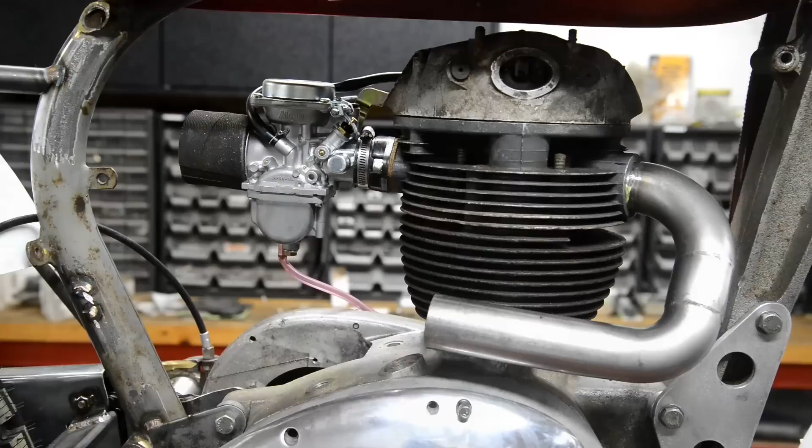Nothing much to say. Let's just move you around and we'll start doing some work. Alright, well, I actually gave this a rub over with the old Scotch-Brite thing. Do you know, I am chuffed to death with that weld in there, that little autogenous weld, putting the pulse on. It just worked out beautifully.

So anyway, as I say, I set to with a couple of different sanding devices, and I got rid of those welds. It still needs finishing off a little bit, and I did the welds at each end as well and gave it a quick polish up.

So now, you know, this inner tube I used - I don't know where I even got it from. It was only about 45 thou wall thickness, so it's a bit thin. Actually, it made it murder to try and weld, because - those of you who maybe know TIG welding better than I do can tell me if I'm wrong on this - I had real difficulty with it, and then I decided that what it probably was, or what my main problem was, is it's so thin.

I mean, I know people weld razor blades together and stuff, but because there's so little metal there, you virtually can't form a puddle, or at least I can't get enough control to just form a puddle without going through. I think I mentioned before that a couple of the people I like to watch to pick up hints and tips from, whenever they're welding alloy, I've never seen them weld anything thinner than about 1/8 of an inch, 3/16, even a quarter, and they're using 1/8 inch rod. So when they strike up an arc, they've got a huge thickness of metal. They can form this nice big puddle, and the puddle flows out, and they can just touch the rod into the leading edge of the puddle. But when you're doing really thin stuff, your puddle is just there - you can't get it to move around. Anyway, that's what I think it is.

Alright, so next question is, let me move you again very slightly, open you out a little bit. What do we do next? Do we need to know where the airbox is going to be to shape, because the oil tank is going to be one of those weird shapes again? Or do we make the oil tank and then fit the airbox in?

I was asked about using a pod filter, and I do, as you know, on the BSAs, the 250s, use a pod filter, but there the carb is right back here and the pod is under the seat with little side covers on. Here, if I put a pod on, it would be right out in the weather, getting water splashed up and dirt on it. So I'm going to make an airbox so we can have the filter part out of the way, breathing into the box instead.

So you're going to have to watch me do some thinking here. We're going to make it go down into here to give us some good volume. We've got a piece that will go through there, down and through there, and then a piece that will come up here.

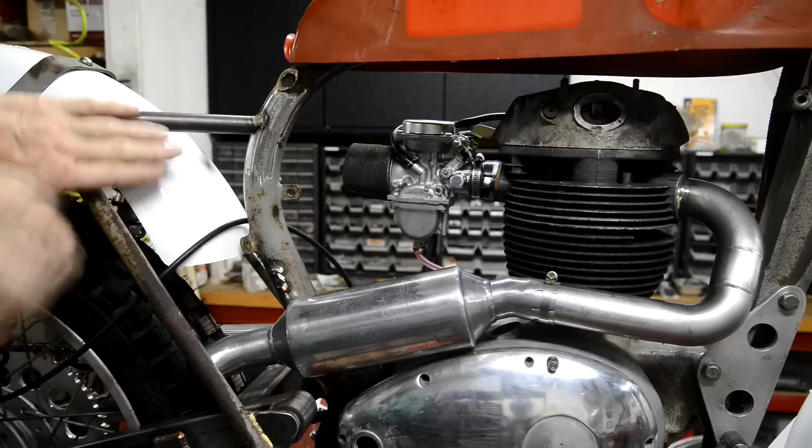Probably will I make it come out on that? Yeah, probably a little bit, not much, because as you know, it's generally tucked in here. It would normally fit in there and then be sort of within the plane of this top tube and this up and down tube, so that it's not sticking out.

Now can't you see, because if it was like that, there's no space here. So we're going to have to build it in here to keep it from being bulky and catching on our legs. Although, if I'm going to be the one riding this, there's going to be no acrobatics. Never did do any acrobatics, and certainly not now I'm in my 70s.

So let me get some cardboard out. Oh, one thing I did do, hang on, I'm going to swing you around even more and open you out, so hold on.

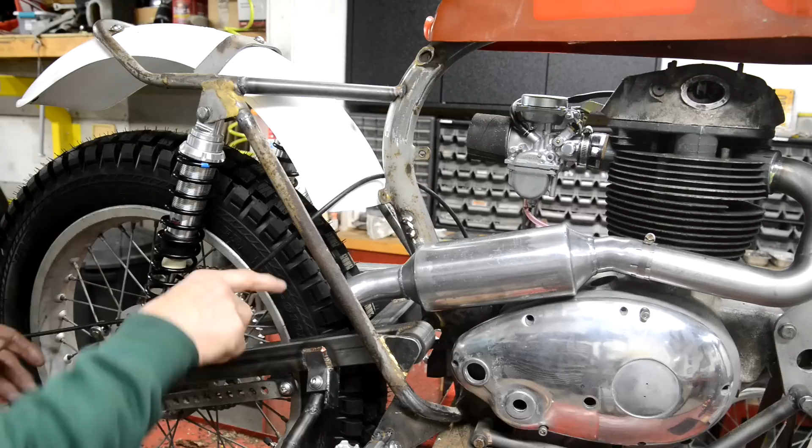Yesterday it was just intriguing me. I dropped the rear suspension units off and lifted this. Actually I dropped it on the stand because I was worried about how close the swinging arm would come to the silencer and the wheel coming in, and I was able to lift it until the wheel was right into the mudguard and it still wasn't touching the silencer, so it's fine where it is, and I think it's well in. I mean, you might touch it a little bit, but

Nothing problematic. Alright, so should we do the prop stand spring? Let's look at the prop stand spring. Let's get this job finished.

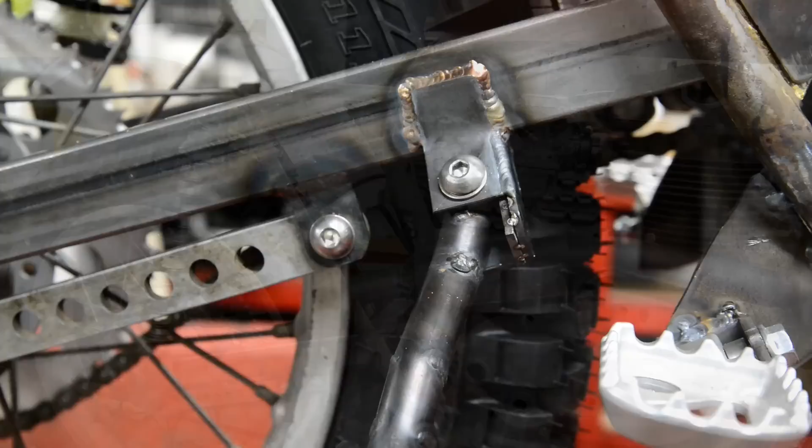So what we're going to do is make two posts out of this stainless steel rod, and we'll turn a groove into them for the spring to go on so that it won't pop out. Now what we need to do is think about this like a triangle, because there are 3 points.

We're going to have the spring fastened up here, that's point 1. Then the spring is going to go onto here, that's the 2nd point when it's up there, and then the spring is going to be down here, that's the 3rd point.

So it forms a triangle, and what we've got to do is arrange it so that when it's there and when it's there, the spring's not in a straight line. It's got to be at an angle, so there it's pulling it up, and there again same thing, it's pulling it up. So there's a point where it's dead straight, and that's the maximum stretch of the spring. But here and there the spring's got to be under tension, not too much - I mean, they're a really strong spring.

So what we need, as I say, this is made like this to go over the pivot point. So if we put it there, that'll pull that up, just above that corner. However, that really wouldn't do for there. It's got to be more over that way.

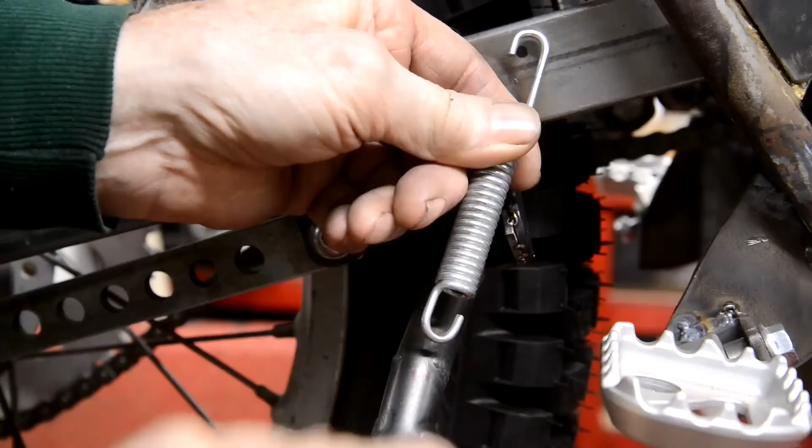So you see what we'll do is I'll turn this down. This is, actually I think it's 3/8. Hold on a second, stay with me here. I believe it's 3/8 rod. It's actually stainless steel rod as well.

Yeah, that's 3/8. So what we'll do is we'll turn that down to 1/4 for about 1/4 of an inch or so. Drill a 1/4 inch hole there, and then that goes in and that holds it. Then we'll bronze it.

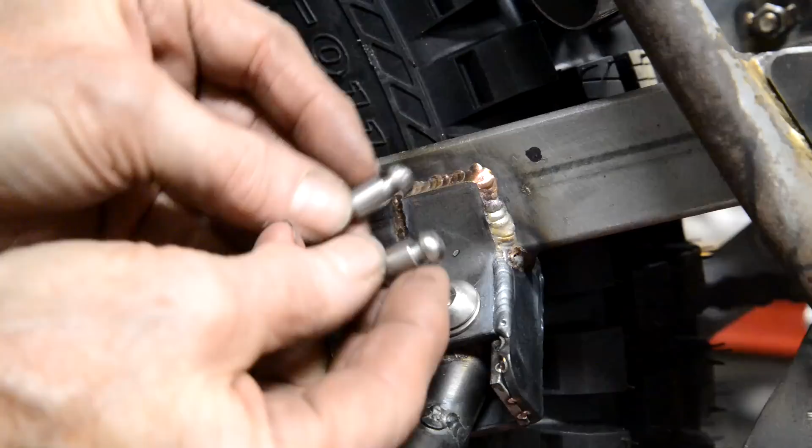So let me cut a couple of these, turn the end down to 1/4 of an inch, and round the top off and put a little groove in. Right, so there's those made. They're not quite identical, but can't have everything, can you? So now I'm going to drill a hole in there.

Have I ever told you I hate keyless chucks?

There we go. I'll put a little chamfer on the end, and I've made these slightly bigger than a 1/4 inch hole. So that's because I might have to put them at an angle, and if they're in nice and tight, then you can do that.

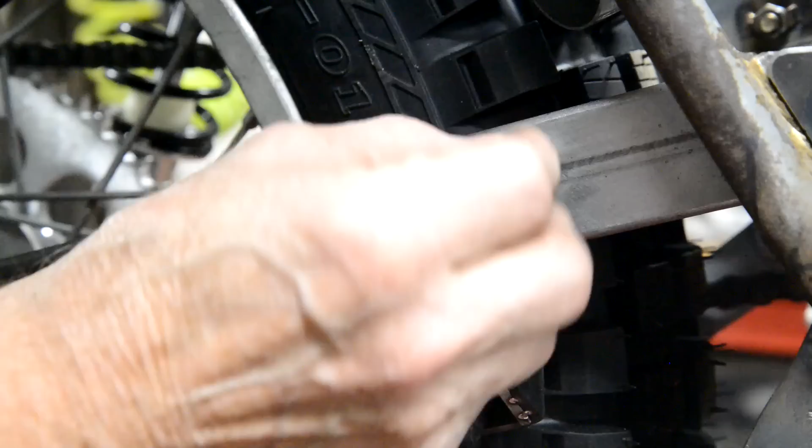Actually, I might have made it too tight to fit. Yeah, I think I have. Hang on. Never fails, does it? I drilled it with a 1/4 inch drill bit, and now it's bloody well loose.

Put a bit of tape on or something to hold it up slightly. Then I'll bronze that on there, which means I've got to bring the welder back over here. So let me do that.

What I'll do actually is I'll put a little bit of bronze on, and then I can tap it around to where I think I'm going to need it. Now I'll put a little bit of bronze on the top, and I've tapped it up a bit.

Now these springs, I've noticed that and that aren't in the same plane. That is twisted round a little bit, so it gives you a little bit of leeway in how it fits onto this one.

So does that want to be like that? Oh shit, look at that. That's not going to work, is it? I mean, it does there.

I'm going to have to put a little bit of a bend in this. Hold on. Right, put a little bit of a bend in there. And that seems to get it better. So if I put that there, that's a bit of a stretch for that. That's going to be about there.

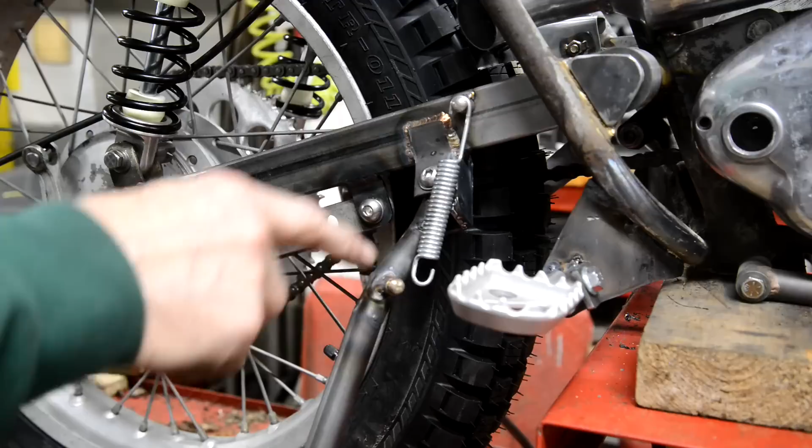Let me see if I can bend this slightly that way. Okay, I've got both little points on. This one I shortened it slightly to bring it in. And I have to admit I haven't got it exactly right, because from there, ooh that's hot, to there is a little bit shorter than from there to there.

I think it's still tight enough, and to be honest, I'd rather have it tight up here so that it doesn't flop down than have it a little less tension on it down there. So let's see if we can put this on here.

Bugger. Actually, it might be easier to put that one on up there. And I know there's going to be lots of, oh, do it with this, do it with that, do it with something else.

Okay, it doesn't matter about that because it won't be there when your foot's actually on there. I think that's alright, we'll put a bit of rubber on there. I'll finish bronzing that when we take it all apart. Okay, that job's done.

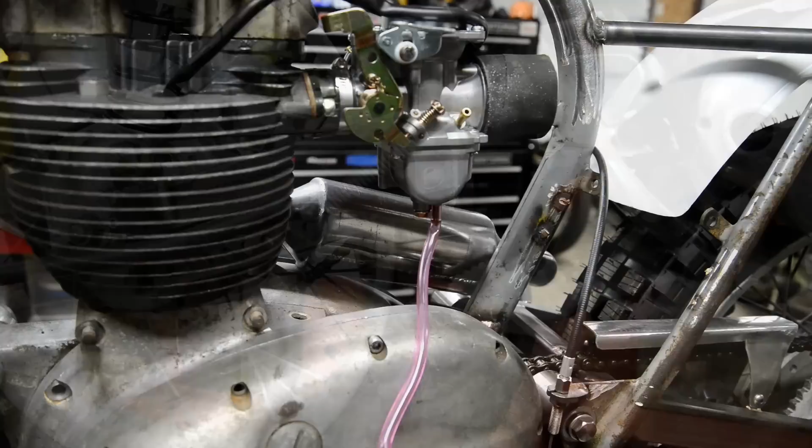Alright, let me get some pieces of cardboard, take the welder away, get some pieces of cardboard and start looking at this oil tank. So we're going to build this oil tank in pieces, and then when it's all together we can flatten it out and see how to make it.

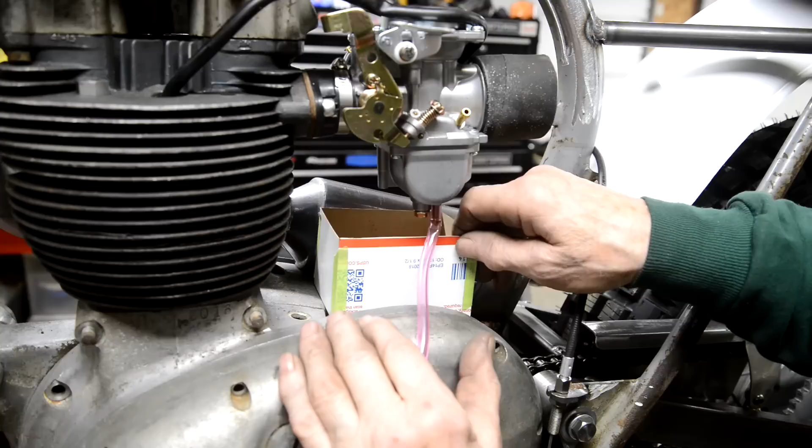So this is the first piece, and actually it could be bigger than this. You could go right up to there, could come back a lot further, that could be a lot longer. And that is 554 cc's.

Right. So I could make that longer. So then it's going to go under there a bit and then up on the other side. Let me just make it like this.

Well, let me measure it and see what the volume's going to be. And then what we might do is slope the back just to make it look a little nicer. And with that coming up to the bottom of the carb and going over, there's going to be plenty of room for the air box, and I think we're going to have lots and lots of volume. So let me make some measurements.

Alright, so that goes there. If I make this longer, make it 6 inches, which comes to about there, and then I just have a piece that comes up here, all simple and square, not leaning back to there, not coming out over the silencer any. Just keep that as simple as that is. Keep it away from the silencer, keep it under the carb, away from the chain, everything like that.

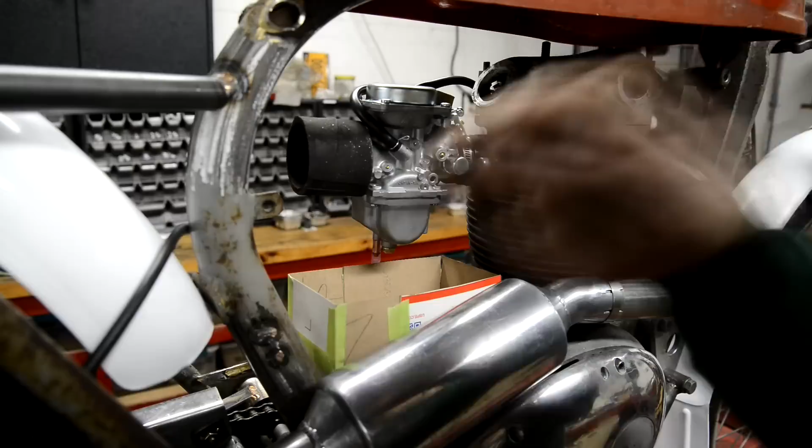That's in the way, isn't it? Okay, well it's lunchtime, so I'll go and eat and then I'll think some more.

Right, it's coming together bit by bit. Doesn't look like it, but it is actually coming together. Gotta do some slight adjustment. I'm going to take the carburetor off so we can put it on the bike.

So as I say, this is just getting it together roughly. I've actually put a curve in this bottom piece to go around that a little bit. For some reason that I measured this, that top should be level.

And I obviously mismeasured that, because that should be, but that's roughly the shape. And then the filler cap on the top.

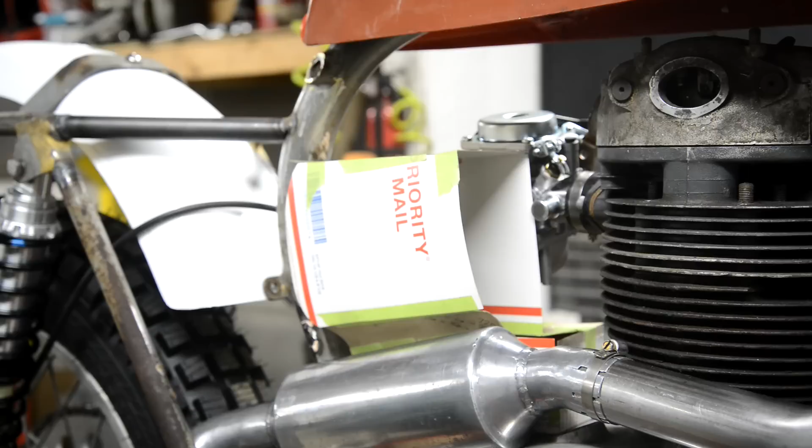The return pipe can come up around the back and in, the take off to the rockers. So I'll do just the same as we did it on the B44, and obviously the feed will go into the bottom of that.

I want to try and get it so that I can have as few joints as possible. So I want to be able to cut it and fold it so that it comes up and folds over, and as I say, as few joints as possible.

I might curve this, just little things to make it look nicer. But basically that is it. And I think, let me have a look here.

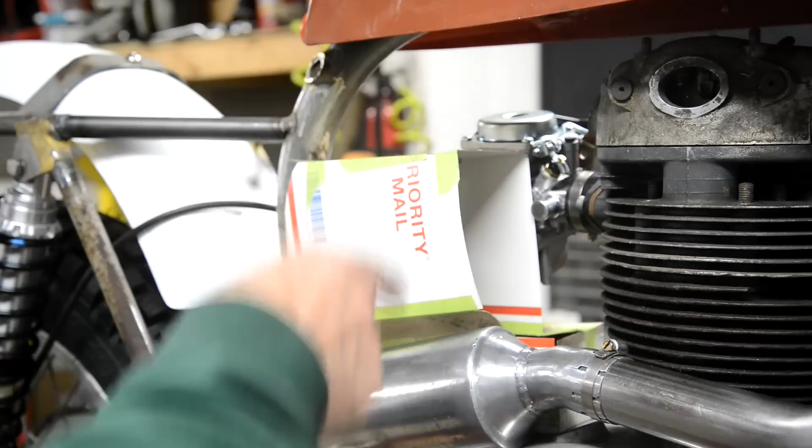Let me just calculate this as 2 boxes. Right, just measured this. It's 15 centimeters by 10 centimeters by 7 centimeters, which comes to just over a litre.

And when we measured the bottom, where'd that come to? 700 cc's for the bottom. I've got it written down somewhere, probably on a bit of cardboard. So anyway, I've got masses of space. So I can afford to slim this down a little bit, put a couple of curves in to make it look nicer.

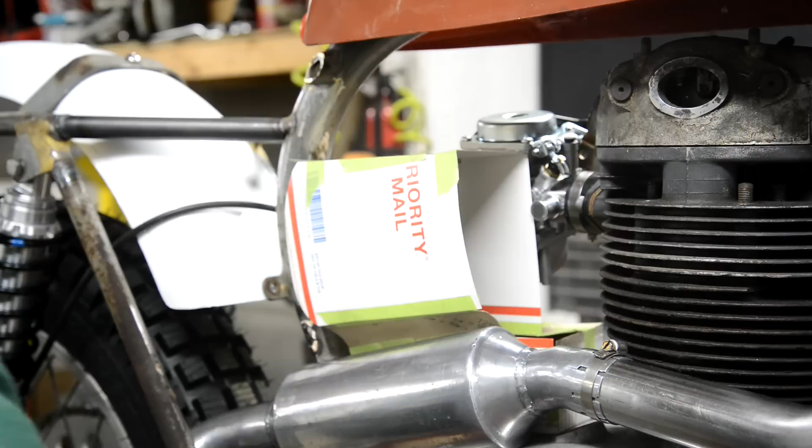Okay, let me think about this some more. Oh, I took that bracket off, by the way, that was on the back of the frame, so that I could come right back. Alright, let's see what we can get done today.

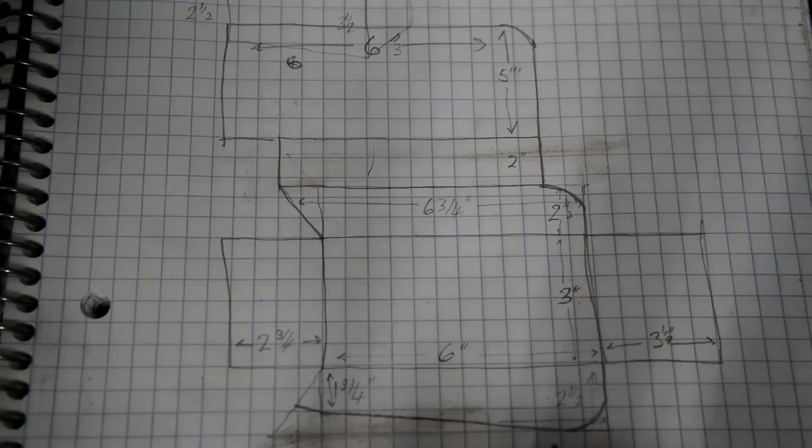From my rough mock-up, I've started to do a layout for the flat sheet of alloy. This part here is the very base of that first box, and that, the four sides coming up. Now this side has got a bit of a slope on it, and it's 2.5 inches at this end and 1 3/4 at this end. That side runs along next to the silencer, and the silencer slopes down.

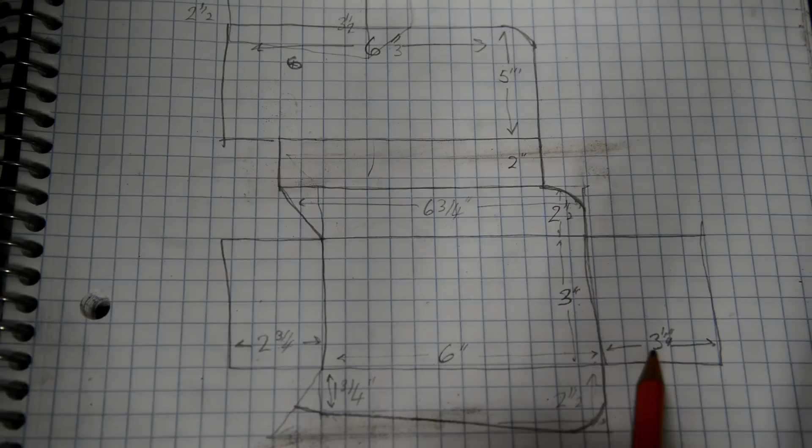So I decided it was good. I'm trying to make this, as I say, with bends rather than welds. I thought it was going to be a bit difficult to do the curved section there. Anyway, these fold up to the height of that bottom box. This is, as you can see, that's 2 3/4. This is 3 1/4, because I'm going to curve this over there.

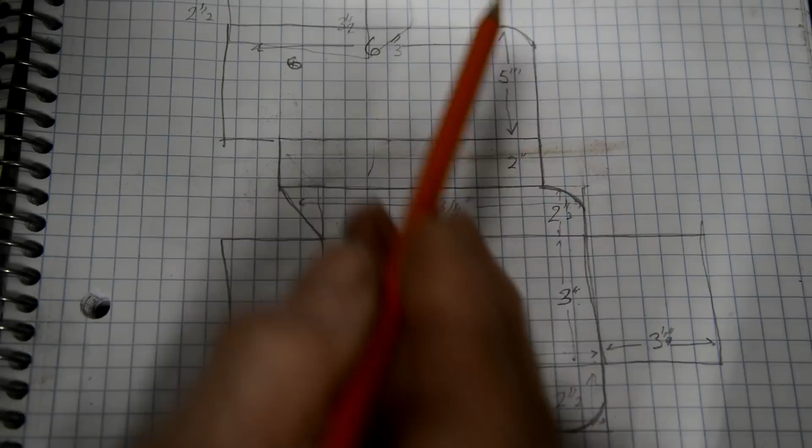Then when this gets folded, that is going to be, in effect, the piece that goes on the top of there. And then that is going to be the side that comes right up to the top, and again, I've curved that. So then I just need flat pieces to come up this and along the top, and the same at the back, and that's it sloping into the curve of the back tube, the spine of the frame.

Alright, so hopefully all these measurements are right. We'll go and lay this out on a piece of alloy, cut it out, anneal it, and then...

See, this is going to fold. These are all going to fold up this way. Then this one is going to fold over that way, and then that one is going to fold up that way.

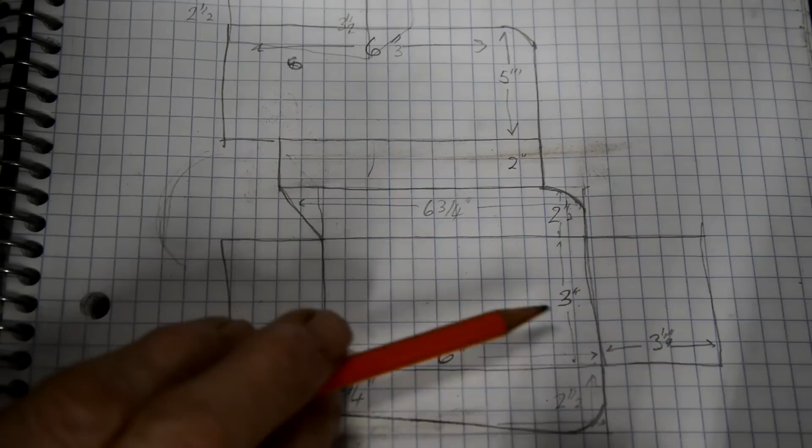So once it's annealed, actually there's some handy things here as well. This is 3 inches wide, so I can use a 1-2-3 block in there to fold this up and this up. 6 inches, I can use a block to fold that up and that up, which will help. It's when we get to these that's going to be difficult.

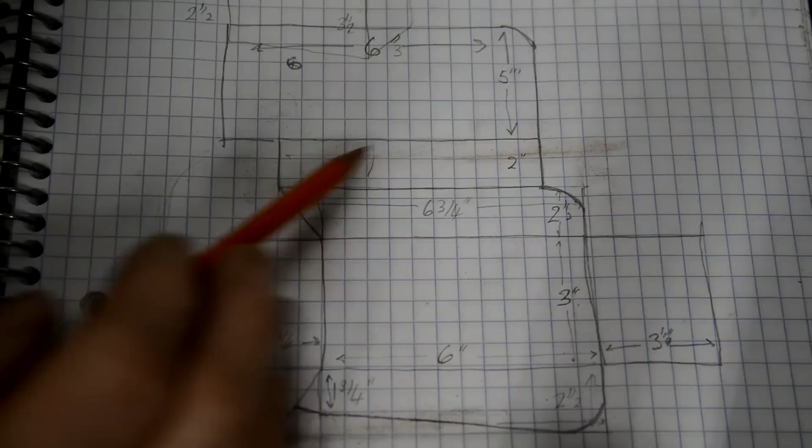I can put that into the brake, bend it. Anyway, we'll see. Let's get it marked out in some alloy and annealed, and then we'll give the bending some thought.

Alright, just to save you commenting, it's not a 4-5-6 block, is it? It's a 2-4-6 block. Alright.

Stage 1. I don't want to be working with a sheet 2x4, so I've opened this out, all bar the piece on this side, just to give me a rough idea, because I've changed a couple of these measurements. I've made that slightly wider.

But that's got my box, my side, my top, this side, and the main top. So that's just given me an idea. So I'll cut a piece off and then work with that rather than the big sheet.

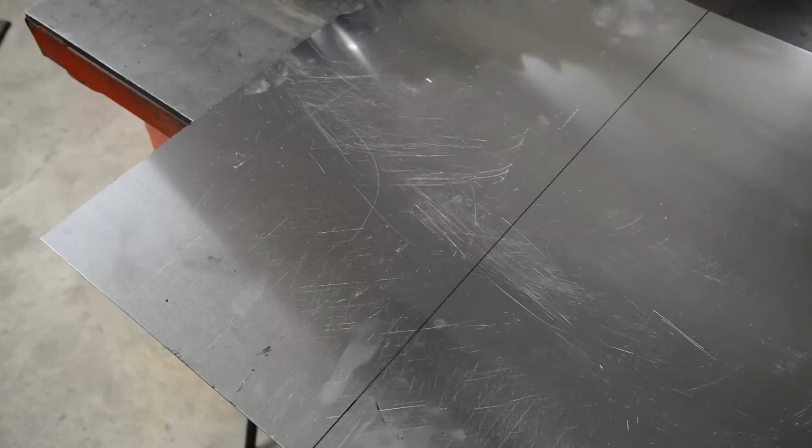Well, I hope there isn't too much glare on this, it's a bit difficult with shiny metal. So there is that cardboard laid out. Again, that is the bottom of the box that sort of goes under the carburetor. There's the side that comes up with the slope on it to match the silencer.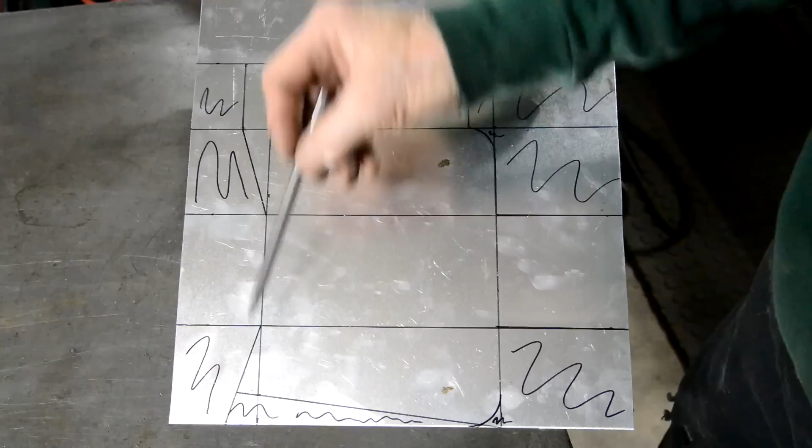These bits here get cut out. That is that end that comes up, and that comes up to be at an angle because of the rear frame tube. This comes up here. We've got our corners marked to be a little bit curved, so that's going to curve around that a bit.

Then this piece here, let's say, that will come up like that, then that will go over, form the top on this. Then this piece here, at this end I've just left it long because it's going to have a curve in it, hopefully, to sort of make it fit into that tube, make it look nice.

So that will, as I say, that will come up, that will be the flat, then this will be the upright part, and then that will be the top. So then we'll have to make up sort of end pieces and this curved piece for here.

So not too much, there's still quite a bit, you know, I mean, all these are going to be welded joints, but the thing is we're not going too far out.

Right, so I'm going to mark over these with a scribe, because once I anneal it, of course, all of these felt tip pen markings will disappear, and I want to be able to see the bend lines.

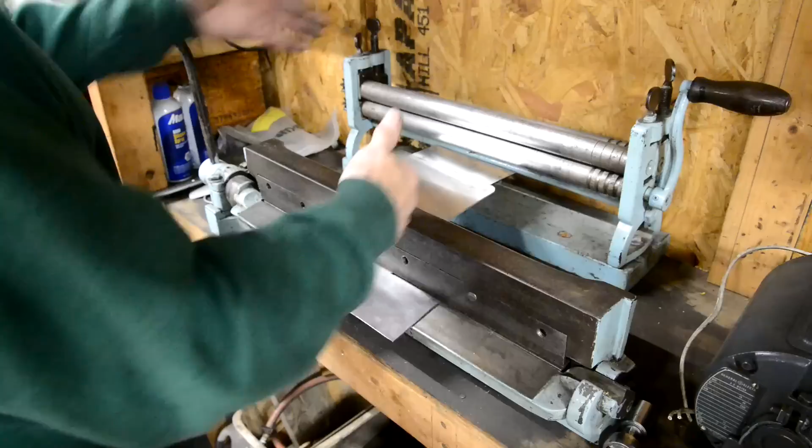Alright, now we get the tricky bit. This is when these fellas that have the presses where these are in sections, so they can take them out and they're bigger. But we don't have that, do we? We have this. And a lot of people don't even have this.

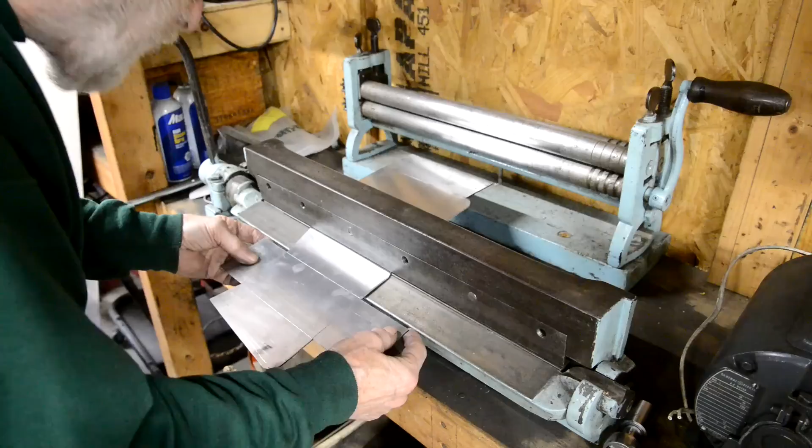Okay, I think I can do that one. Pull that out to there. Hang on, I'm going to turn you off. Alright, I thought for a minute that was as big as this, but that's 3 inches tall, this is 2.5.

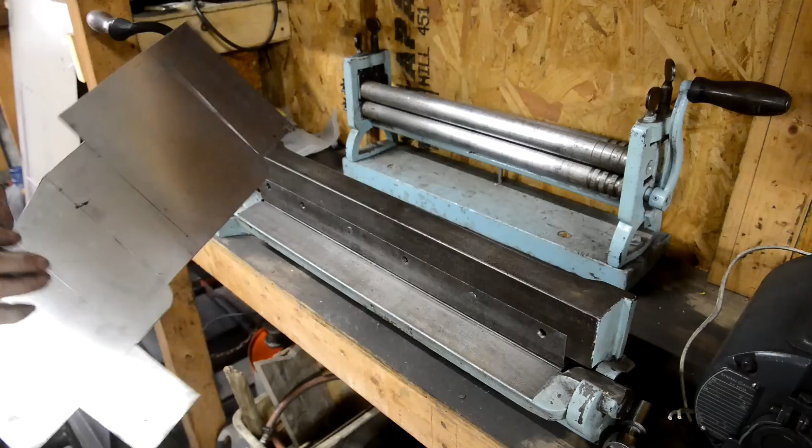That's annoying. But I think we're going to be able to get really close. I think I can do that one, pull it back, do that one, pull it back, do that one. Oh, I turn it over to do that one, and then pull it out and do that one.

I think there's only going to be one that's going to be slightly awkward, and that's the second one. Anyway, let's see what we can do. That roller is in the way. There we go. Right, so there's one.

Shit, that's gone over. That's gone over right angled. I'm going to stop you again. Alright, bit of square. Yeah, I went well over there. Damn.

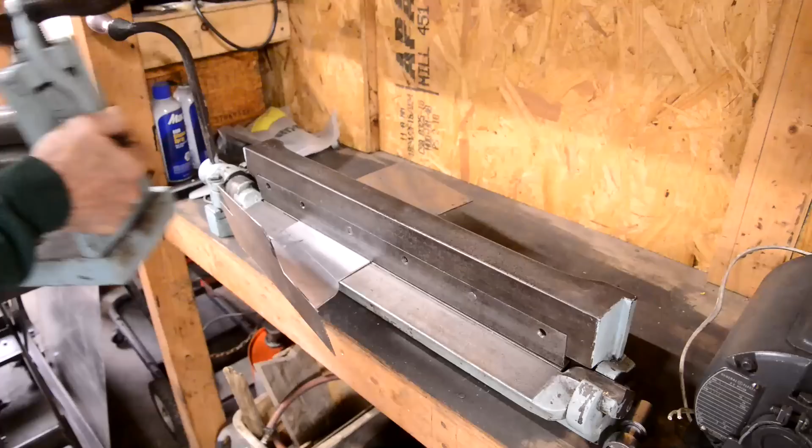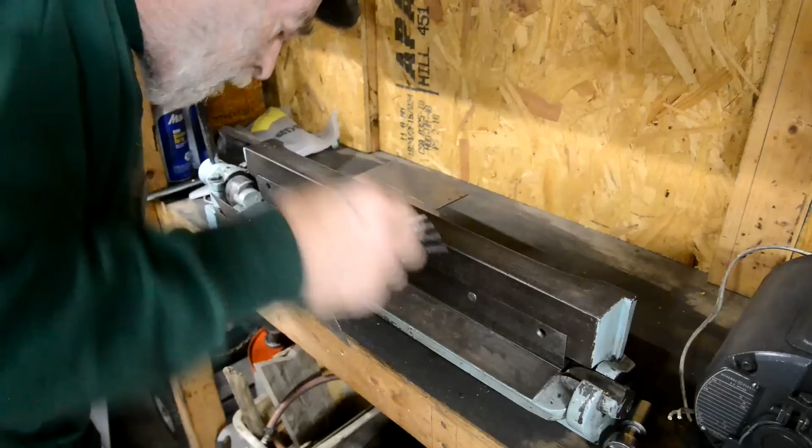Oh, that thing is in the back now. Oh, damn it. Right, that's pretty close. See, if I can get it to start, then that helps. Right. And that is going to go in.

Now we're going to have to do these on the bench. Bugger! Thought we could maybe do that all in this. I think we can do that one.

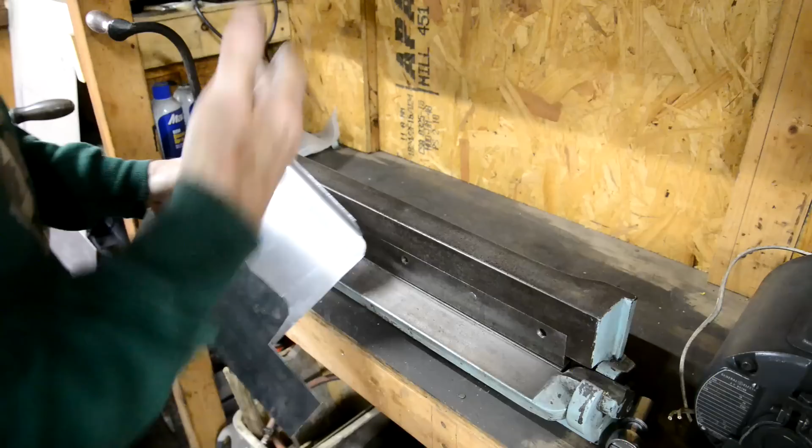They're all going over. But it's nicely annealed, so let's put it on the bench. Alright then, we're going to have to do this with a variety of backing things. Like thus. So, that's that. That one can go in there like that.

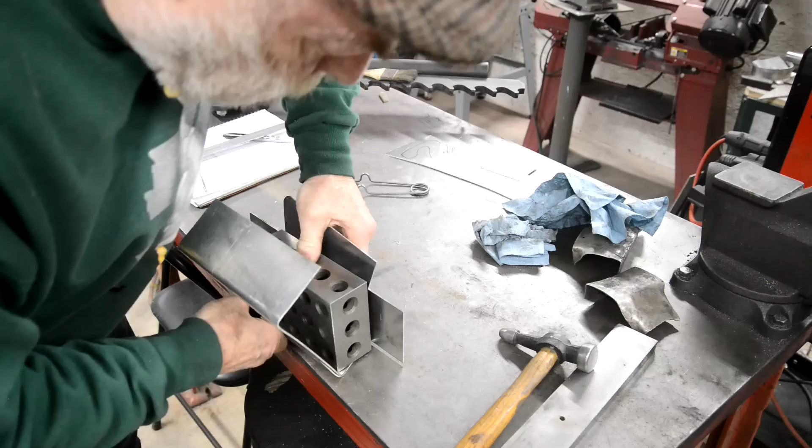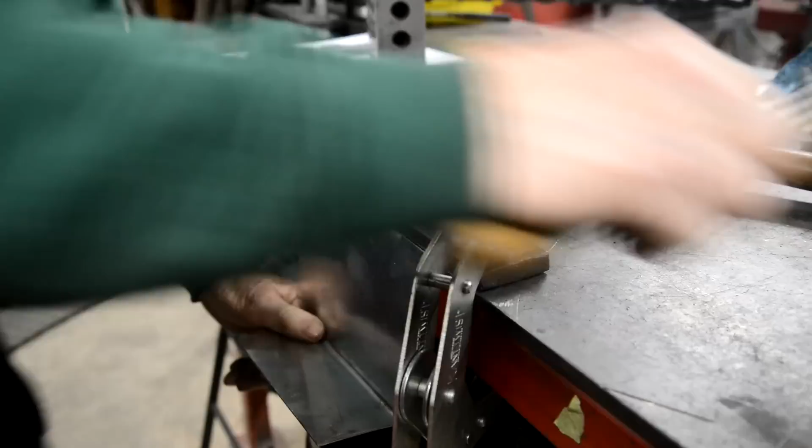This is going to be noisy for you. I'm going to have to put my ear protectors in. So let me do some banging and bring you back. I'll show you a couple of setups. Here's one to get this thing done. Oh, I forgot I haven't put my ear things in.

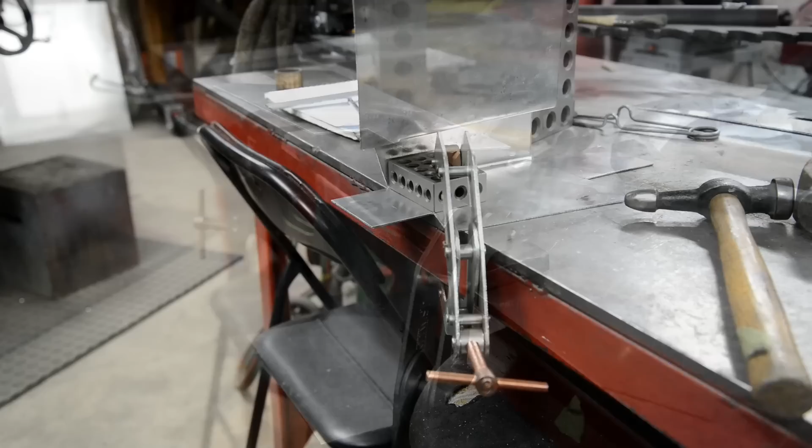Hang on. Up. Okay. And there's a 1, 2, 3 block which will fit in. I'll use the plastic hammer. Well, that's bloody well miles out the way that's bent. Ah, bugger!

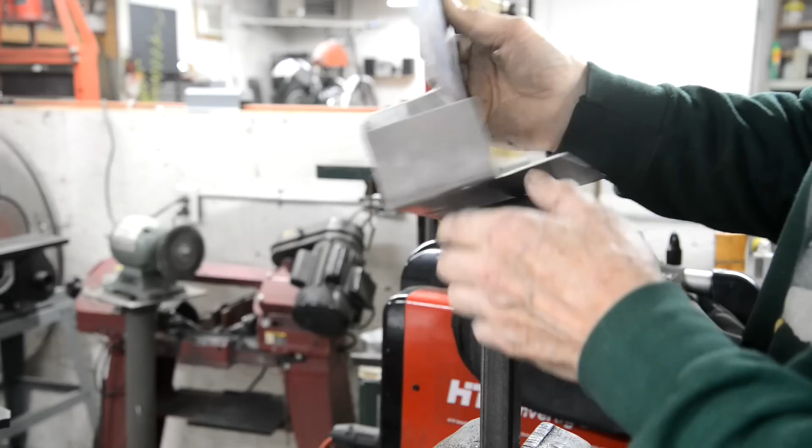Well, what a surprise. That was a measurement error on my part, but I've got to put in the complete piece in the back here. So I'll just make it longer and we're going to have a seam there, but never mind. So the next thing I've got to do is, before I fold this up, I've got to put a curve in it to go around that.

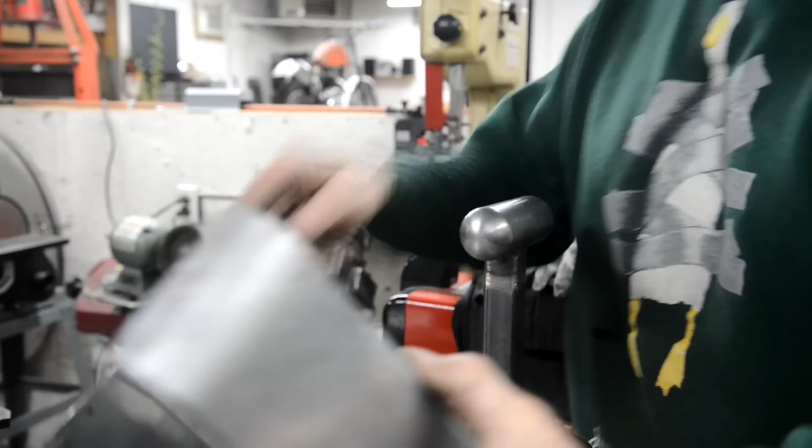So the next thing is to fold this up to here, and then actually I might put a few tacks on to start to hold it rigid. This one's going to be a bugger. I don't know how I'm going to get in to do that, but we'll think of something. We always do. There's that round.

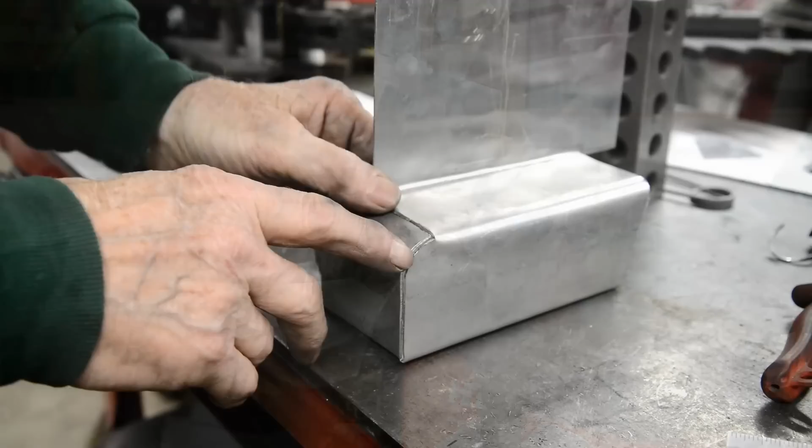As I say, I think I'll do a couple of tacks. That needs to get tightened up a little bit. I've got some more things out that I can form stuff on. That's come out reasonably well. Let's say, let me get this right, and then we're going to do a bit of weld there.

Right, well, I've got that done all the way around there, and I've got that end done as well up there. You know, I'm still not getting complete penetration. It looks great, but it's not coming all the way through. I don't know, if I go any more, I just seem to hole it. I know it's supposed to almost keyhole and that you fill it in, but anyway, we'll keep going.

So as you can see, I've still got to do a little bit of a bend up on that, and this is much too round. I wish I'd never done it in that bloody press now. That thing, I'm going to throw that away. Useless.

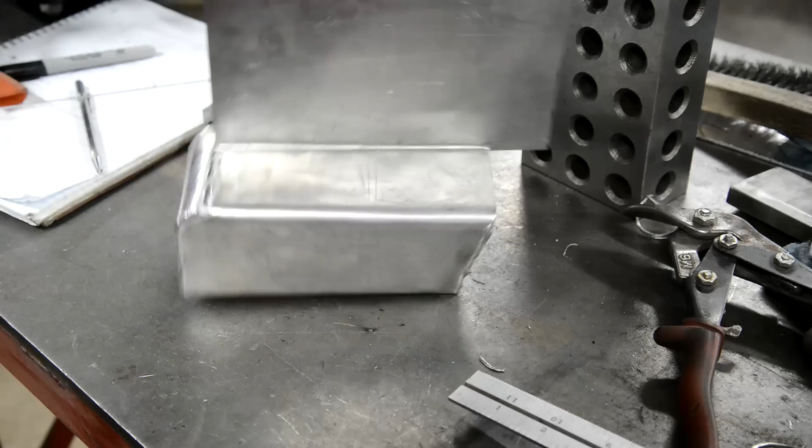So I've got to get something in there that I can square it up on. Then we've got to think of some way to be able to fold that up and get it to a good square fitting. Get something up there.

Anyway, it's actually lunchtime. All right.

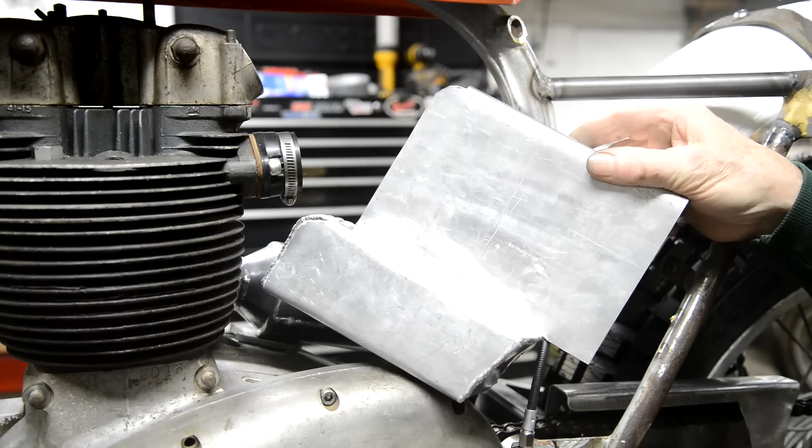I've done all that welding. Never touched the tungsten once. No problems at all. And the very last little bit I did got a bit ugly.

Right, so the next thing we need to do, as I say, I cut this big because I'm going to get it to curve there. So, hang on, I keep asking you to hang on, don't I? Instead of editing things out of it, but what the hell? You've got nothing better to do, have you?

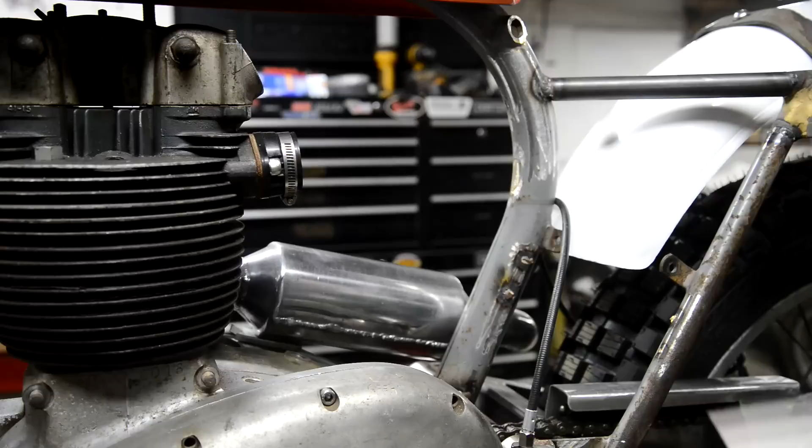So first of all, I bent up a piece of rod, and then I transferred that to a piece of cardboard. Alright? So now what I need to know is where this curve is going to start.

We want that to be almost as low as we can get it, because it needs to be below the carburetor. So it wants to be about there.

So now we put that in to match up with our curve. And that's where our curve is going to start. Now we're going to put that, cut that off, put that onto there, mark that out, cut it. And there we go.

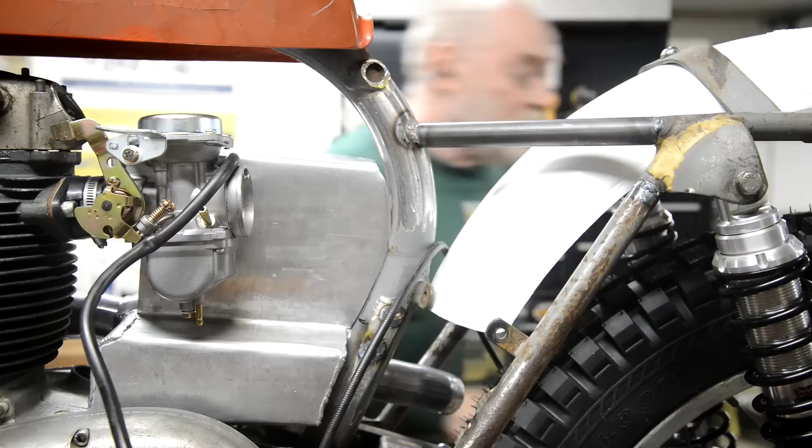Now we have the tricky side to do with the other curved piece. Right, so we've got all this done, all welded up. I actually cut this at a bit more of an angle. I just checked it in there and it needed to come down more to follow the silencer. I've also cut a hole in the top for where the filler cap's going to be.

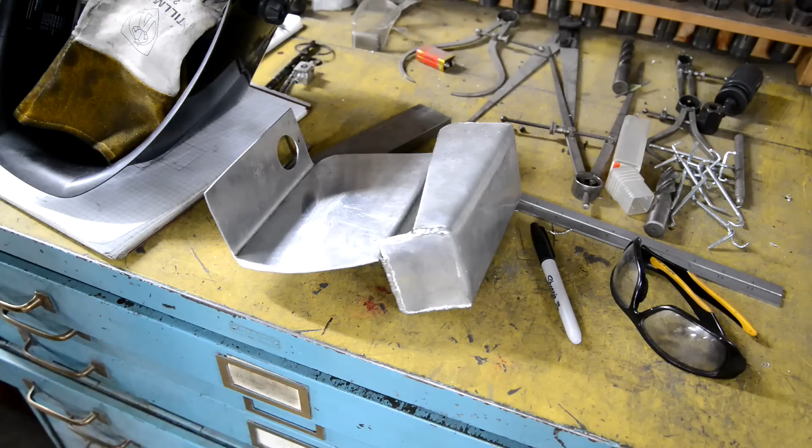Now we get to the tricky bit. I mean, this was tricky enough, but this is, it's going to come up this way because we've got to put a curve in it to go around the silencer. So the curve is there, but then it doesn't keep going up. It's got to come back here and back there.

So I have cut a piece and just annealed it, which I'm hoping is going to be big enough to do the whole thing. So first we're going to put this in the rollers to get that curve on it, and then it's got to be bent back. Alright, so let's go and see what we can do.

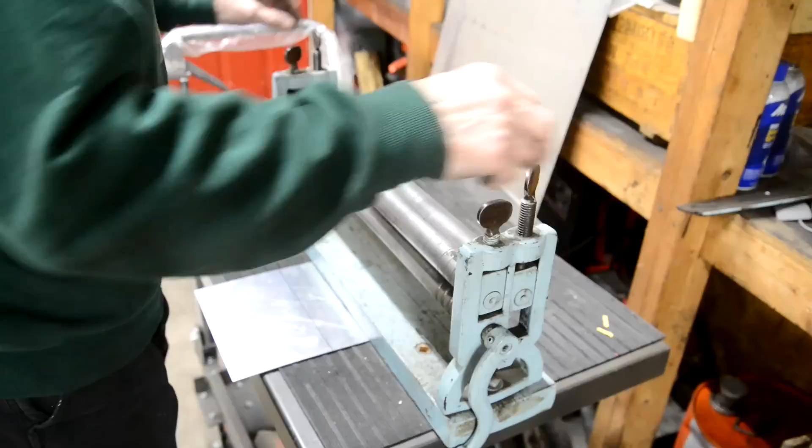So if my piece of cardboard is to be believed, 2 inches of it is curved, and then we want the bend. So let's think, what was it? Anti-clockwise, wasn't it? So clockwise will make it go down.

Get this so it's coming up through there the same. That was going the wrong way there, wasn't I?

Some things could be easier, you know, and then of course you wouldn't have to sit around waiting for things to happen quite so much, would you? Right, that seems to be coming through straight.

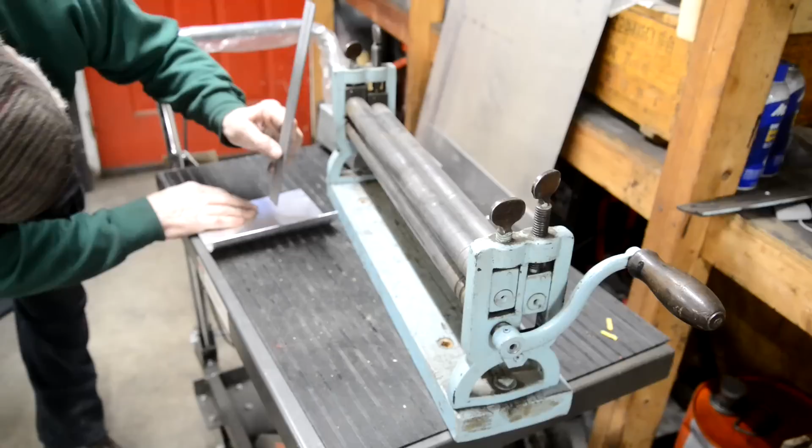I didn't just say, oh, that looks about right. Half. Hang on, I'll turn you off until I'm right. Okay, so this is now 1.5 inches. Right, so what I'm going to do is bend this up like that.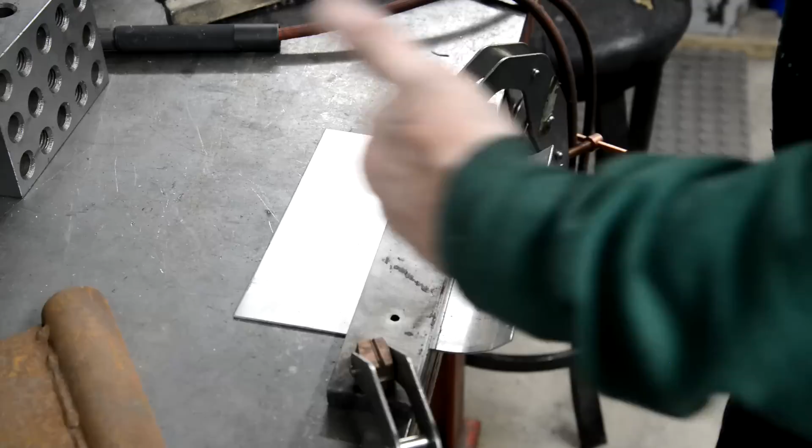No, that's undoing. I might have to bend that over a form. Hang on, where's the other? Hang on. All right, we'll try this.

Come on! Considering you've been annealed, you're not bending very well.

I should have just bent this and then formed this around something suitably round, you know that? Shouldn't have. Yes, Michael, you should have.

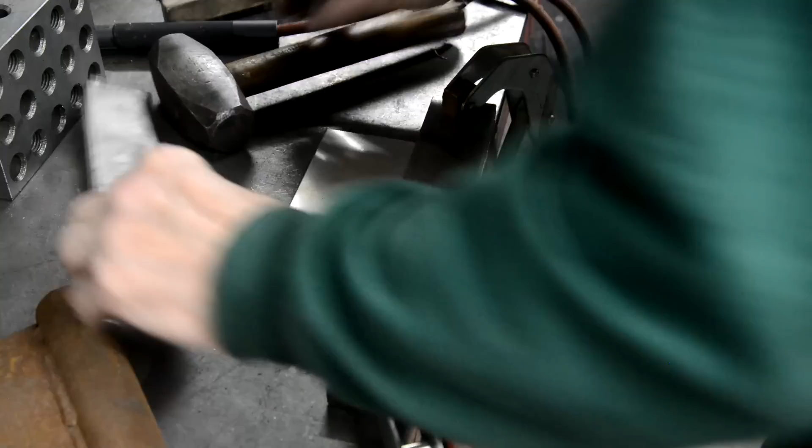Alright, let me go and check this on the bike. I've got to make another one. And that goes on. It's too short.

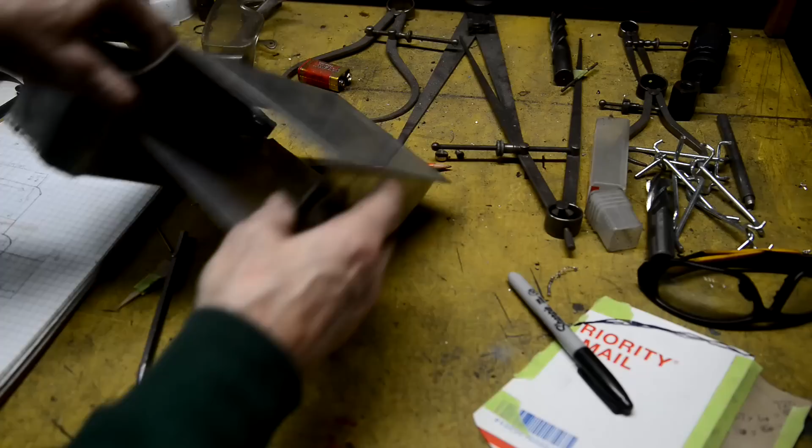That's got to be bent round that way a bit, which will bring this down. Then it misses that, and I couldn't imagine why. And then I thought, I know why. I made this using the original piece of cardboard, and of course I cut that at an angle so this came down. So it doesn't want to be whatever that was, it wants to be longer that way.

So that is an absolute bugger, and that is going to wait until tomorrow, so I'll see you then.

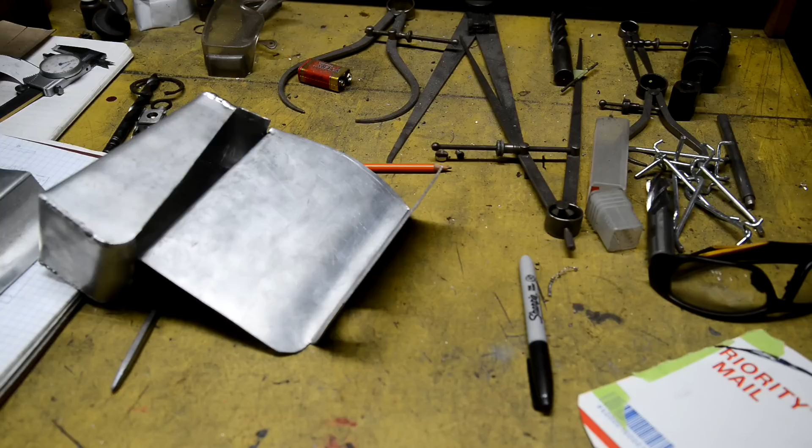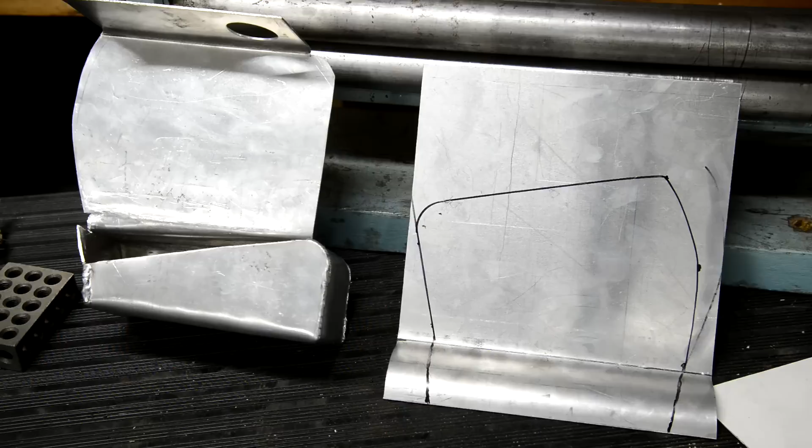So left it till this morning. There's the new piece, so hopefully that'll all match up. Part of it was drawing that piece was easy. See, I put it on that way, so that was easy.

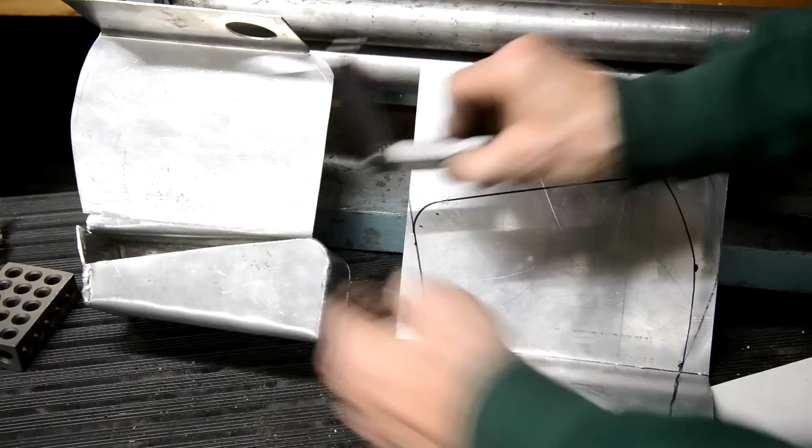To get these bits around here, what I did was I put it on and then I used a square, went round like that and marked. You can see there, there. So fingers crossed again, this should come out right. Well, that seems to be about it. That goes from there to there.

Everything looks good. Alright, I'm going to tack there, tack along the top, and then we'll make up these two end pieces, because as you can see, they've got to be drawn out to be right. So let me just go ahead and do that because I'm virtually up to an hour and this is all I'm going to do this week.

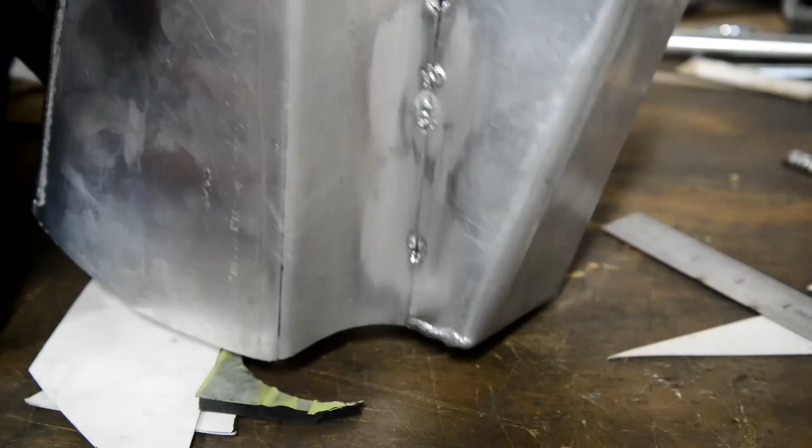Well, here's what gets to me, look. I just welded that, look at it, it is perfect. So then I go around to the bottom part and look at it. Absolute rubbish. It's as if I haven't got the oxide off and it's melting through. And I was so pleased with that one.

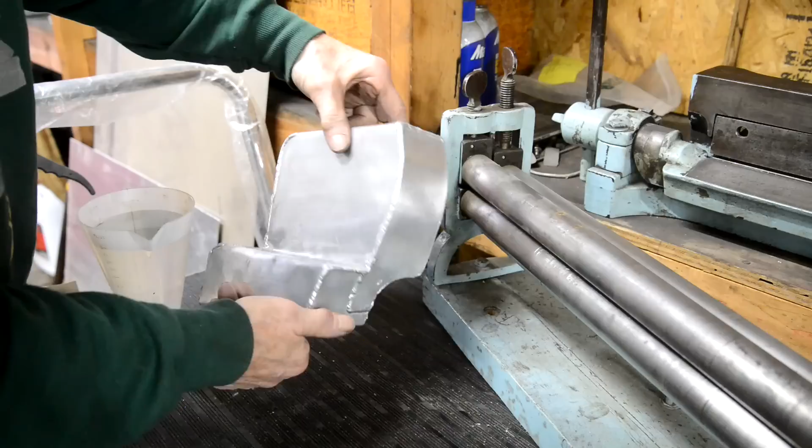Alright, well, is that cool? That's so nice, all welded up. And you know what? All that welding went perfectly until I got to, where is it, that one corner. It's probably taken me as long to do that corner. I don't know how many times I've ground it out, redone it, ground it. Just kept getting it, I don't know what it was.

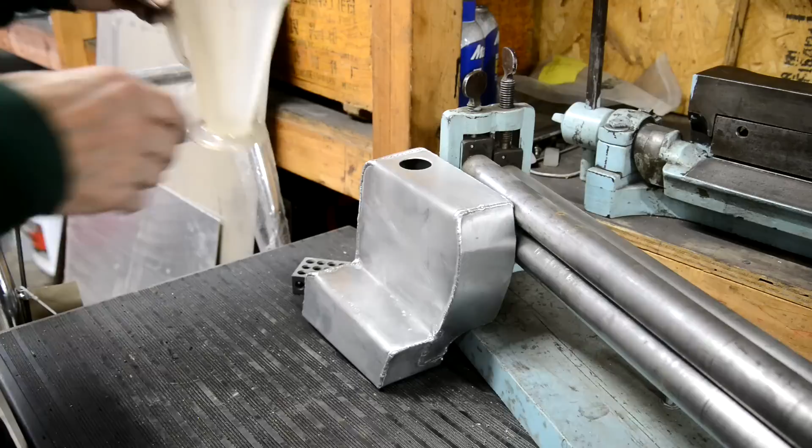Anyway, so what we're going to do now is see what the volume is. Now, we're going to be over an hour actually, but bear with me. I don't think I've ever got one of these to come out at what I've calculated it to, but we shall see.

Right, that's 900 mil. It's basically a quart. And hang on, no sorry, 500 mil. I was going to say, sure this thing's only a pint. 500.

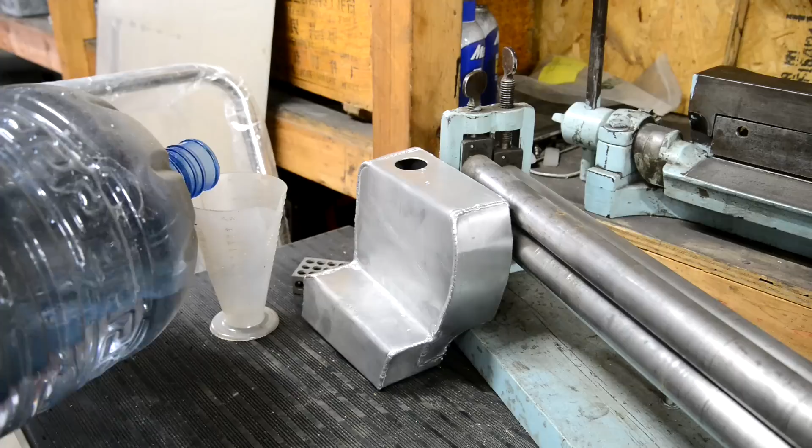Thousand. So there's a litre. And that bloody corner's leaking. A tiny leak at that corner as well. Okay.

There's 1500. Oh, and I'm a long way down. God, I'm leaking all over. Let's find out, just out of interest, exactly how much there is.

We're losing a few cc's, but that's alright. What was that? That's 2 litres, okay? We've got a little dribble. We're just underneath, so that's plenty.